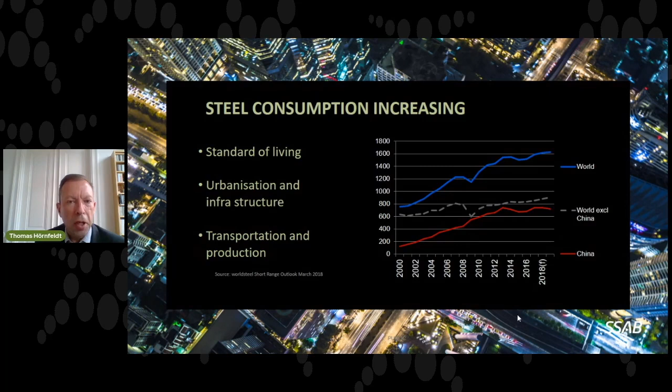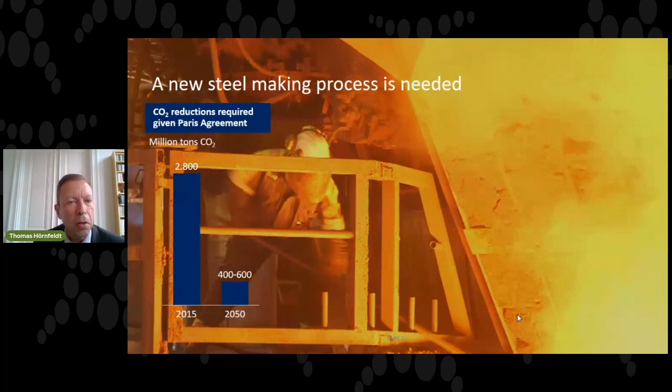If we put this in relation to the reduction of emissions from the steel industry that is necessary according to the Paris Agreement, and if we in that context also look at the increased use of steel in the world, then we see that these two charts, they don't really make any sense unless we can find another way of making steel. You can also see that when we indicate the global steel demand, a lot of that can be covered by the dark blue section here, which is recirculated steel scrap, but not all of it.

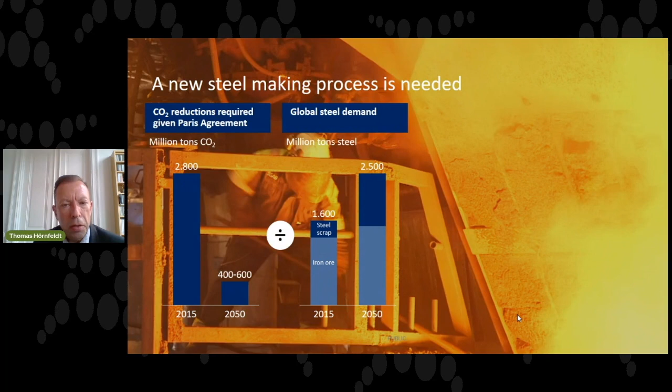For the foreseeable future, we need to be able to make steel not only from recycled content, but also from virgin materials, from iron ore in a sustainable way. And that means that we need a new steel making process. We cannot afford the currently roughly 1.8 tons of CO2 per ton of steel produced in the future. We must get much closer to zero. What we're talking about is a reduction of more than 90%, and that really means that we need to reinvent the steel making process.

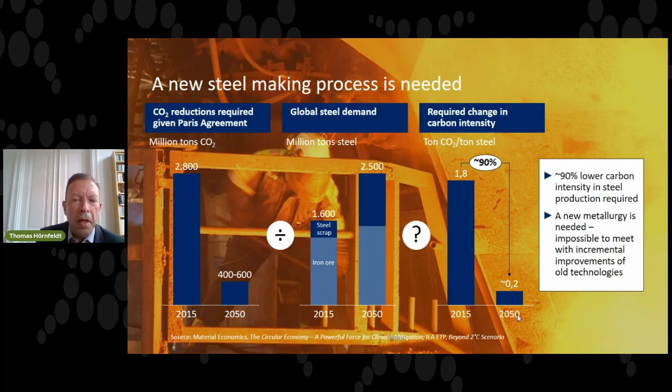And that is due to the fact that iron ore is pretty much iron oxide. It's iron and it's oxygen, and in order to get to the iron, you need to remove the oxygen, which, since the blast furnace was invented in 1300 something, has been done with carbon in the form of coke. And then the oxygen moves to carbon, and you get CO2 as a byproduct from the steel making.

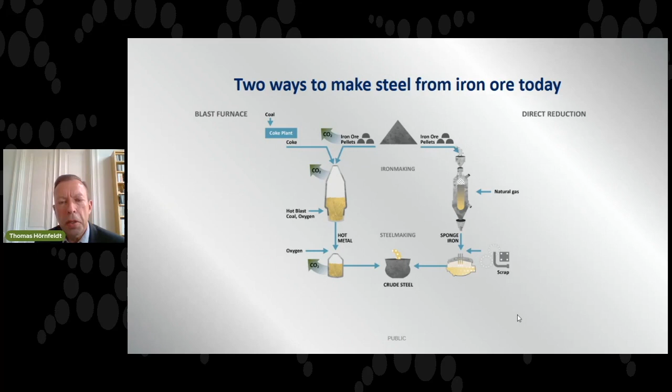But still, we were looking at this, and we thought that the logical step for us would be to use direct reduction, but instead of natural gas, we would be using hydrogen gas instead. What would happen then? Well, then the oxygen in the iron ore would move not to carbon, but to hydrogen and form H2O, also known as water, as a byproduct.

And furthermore, we can use the fact that in Scandinavia we have a virtually CO2-free power grid in order to make hydrogen out of water with electrolysis. Hydrogen that we put into our process, and then we get the water back as a byproduct. And the clever thing with this is that hydrogen is a commodity that we can actually store.

And with an increasing amount of renewable energy sources in the power grid, we have the situation already today, especially in the summer, when the sun is shining, the wind is blowing, and the rivers are full, that we produce more electricity than we can use in these countries. And then we can take that excess electricity, produce a lot of hydrogen that we can then store and use as it is needed in our own processes.

And vice versa, on a cold, dark winter night with less electricity available, we can actually take our load off the network. We can stop making hydrogen and use hydrogen that we have already produced and stored instead. That way, we can not only make fossil-free steel, but we can also help to make sure that we're utilizing every drop of renewable electricity that we have available in the system today.

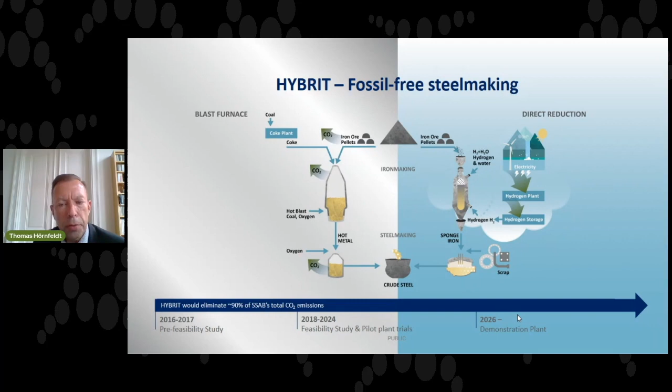And in fact, we have two objectives as SSAB. As I said, we have committed to introduce fossil-free steel to the market in 2026, and our long-term objective is to latest by 2045 be probably the world's first entirely fossil-free steel company.

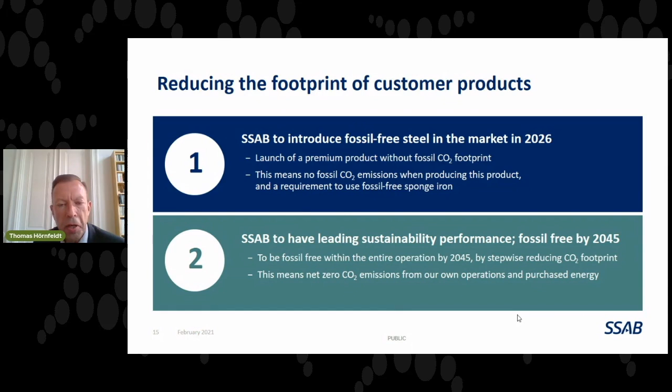Now the pilot plant is there. It was inaugurated in August last year by the Swedish Prime Minister and Minister for Climate. And it is now up and running. We're making trial runs. It doesn't have any commercial production as such, but we are in the process of running campaigns, testing parameters, evaluating the results, and learning how to run this process in an industrial environment.

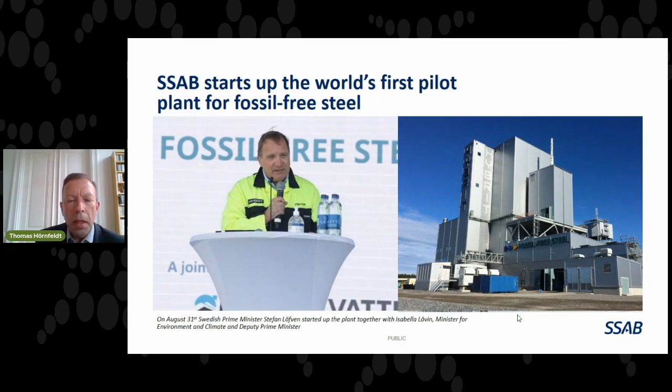And if we look at the time schedule a bit longer term, what we can see is that we have the pilot plant, and we will be running the pilot plant to learn more and more towards 2025 or so. We're right now also in the middle of preparing our pilot for hydrogen storage in order to optimize our use of electricity, like we talked about before.

And when it comes to the demonstration plant, the real industrial-sized plant with a capacity of more than 1 million tons, we have a couple of months ago announced the site decision. It will be built in northern Sweden. We will start the erection activities towards 2023, and it will be started up towards 2025 in order to be able to deliver those commercial products in 2026.

And at the same time, we're also building a new electric arc furnace at our Oxelösund facility, the arc furnace that we need in order to handle the sponge iron that we get from this fossil-free iron making process. And at the same time, we're closing down the blast furnace that we are currently using at our Oxelösund facility. And that will then be the first blast furnace closure, and we will then step by step close down the remaining 3 blast furnaces that we have in operation in order, again, to be an entirely fossil-free steel company in the future.

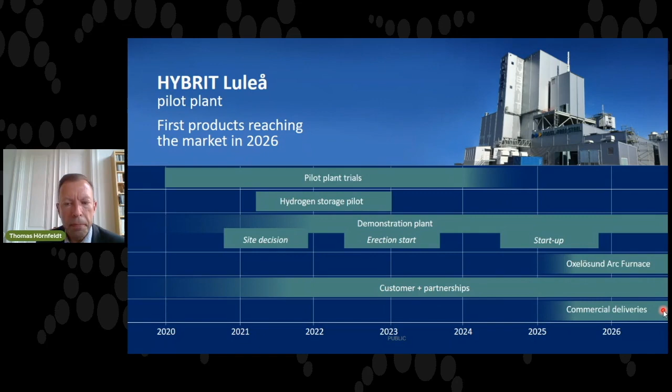And this is where we will build this demonstration plant. It will be located next to the iron ore mine operated by our iron ore supplier LKAB in Gällivare in northern Sweden. As I said, it will have a capacity of 1.3 million tons in the first stage, and we're looking at a little more than double that until 2030. And we have now put it next to the iron ore mine in order to have short transportation route, in order to have good transportation and logistic solutions that are already in place, and also to be able to optimize electricity supply and energy optimization.

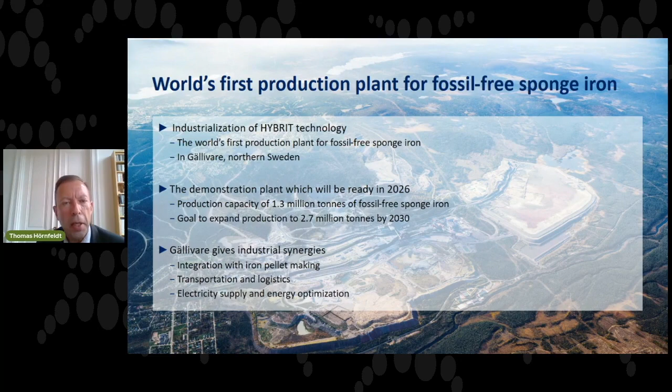And speaking of energy optimization, this is a very schematic picture of our hydrogen storage. We will be using underground caverns, steel lined caverns, in order to make them hold the hydrogen. And this is where we will store the hydrogen in order, again, to produce hydrogen when we have excess electricity, and then being able to use that as it is needed in our own processes.

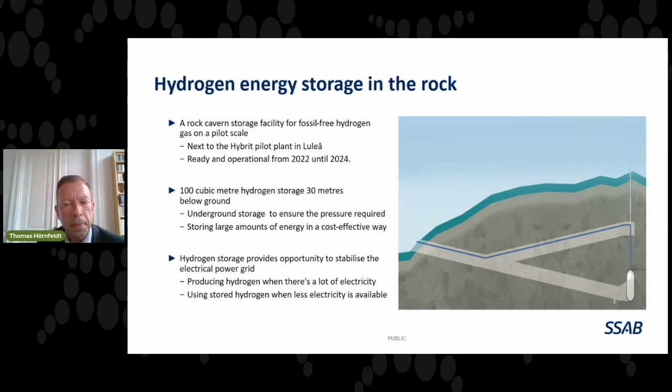And what makes us a little unique, and what I would like to underline once more, is that we're not only looking into our own steelmaking processes, but that we are doing this together with our partners for iron ore and for electricity. So LKAB has committed to going fossil-free as well, so that in 2026, when we put fossil-free steel in the market, there will be no diesel-powered machines in the mine. There will be no fossil fuels used in the pelletizing process.

And in the same way, Vattenfall will make sure that we're only using fossil-free electricity, so that we really have a fossil-free value chain all the way from the iron ore mine to the SSAB factory gate, and so that we can really offer our customers and partners a chance to be part of this fossil-free value chain and extend this fossil-free value chain to their customers and end users.

This has been said before, but it deserves to be repeated. What we're talking about in our new processes is really changing the iron making part of the process where we have the major environmental impact today. The downstream processes where we actually create the properties of the steels that we make, they will remain the same as today. They will be electrified, they will be using fossil-free fuels and fossil-free electricity, but they will be basically the same as today. And that is the reason that we can confidently say to our customers and partners that our steels will have at least the same performance in the future as they do today.